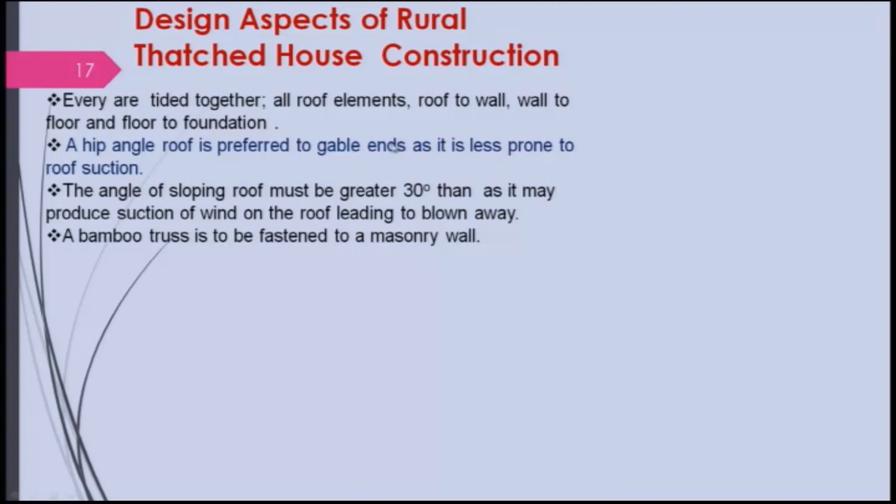Today we will continue to discuss how traditional knowledge had applied science. We teach science and technology, but we do not really make people practice it in their life. So, let us look at some more aspects. As we have seen, in a thatched house several things will be there. For example, there will be roofs made of bamboo, and this is basically the truss.

There will be other roof elements also; this you can call the spar, this you can call a rafter kind of thing, and this is a truss. This truss has to be connected with the column, and all the roof elements, which are part of the roof, have to be joined together.

That is the first important thing, and then the roof has to be joined to the wall and also to the column. In this case it is being joined here, but in earlier days people were using coir rope, and later on people started using iron nails. Again, the wall to the floor and the floor to the foundation, which is not shown here, have to be joined, otherwise the structure will not be that stable.

Besides this, there are two kinds of roof one can think of. One is the hip roof, and the other is the gable roof. There is an overhang here. Generally the hip roof is preferred over gable ends, as it is less prone to damage, because it is secured very well with the wall. Therefore, particularly when the wind speed is very high, it will not lift it out.

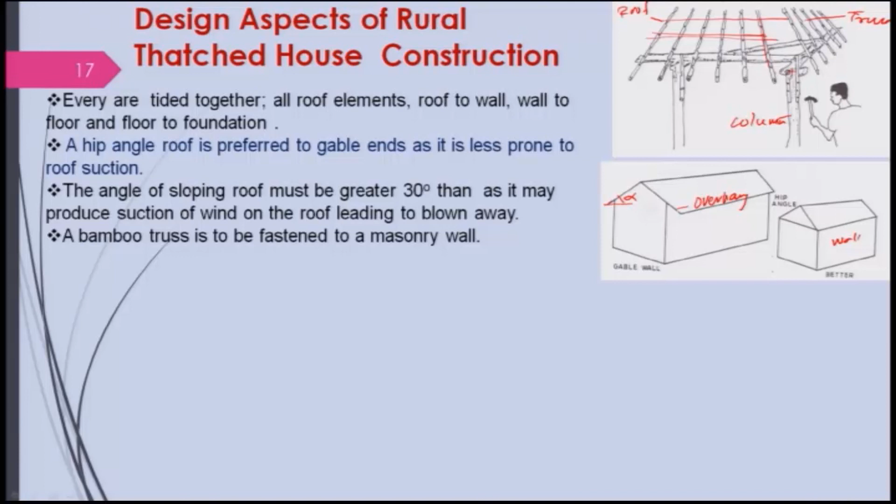The angle of sloping of the roof must be greater than 30 degrees, as a smaller angle may produce suction of wind on the roof, leading to it being blown away. If this small angle is alpha, say 10, 15 to 20 degrees, it is generally recommended that it be more than 30. Question arises why? Let me try to explain.

Suppose the wind is coming like this, and the roof has an angle. I can resolve this with the angle alpha. If the velocity is v, this component will be v cos alpha, and this will be v sin alpha. So if the angle is small, the velocity v cos alpha will be higher, and the static pressure on the surface of the roof will be affected.

We can use simple Bernoulli's principle: P_t = P + ½ ρ (V cos α)². That means if alpha is smaller, (V cos α)² will be higher, and then the pressure will be lower.

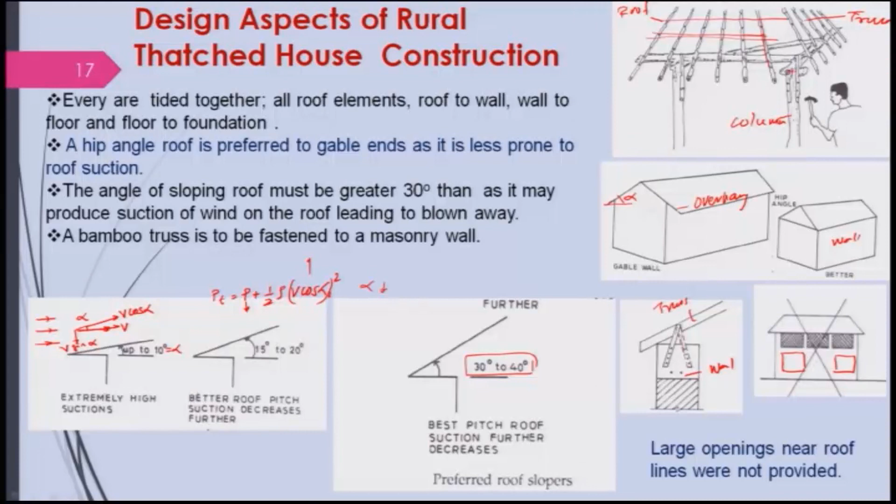So, these are the kinds of scientific ideas people had at that time, which you can see today in remote places, but in modern villages where concrete and mortar are used profusely, you will not find this kind of concept being implemented, because they do not know what they are doing.

So, besides this there is a ventilation system, which was very important in ancient rural housing, because air velocity created discomfort, particularly when either cold or hot air blows directly onto a human being. You might have experienced this yourself. But if it comes tangentially, not directly, then you may feel good, provided the velocity is not that high. So that has been taken care of in the house also.

It is important to have fresh air constantly entering the house throughout the year, not only in the summer or the rainy season, but in other seasons also. And it must also be distributed evenly to minimize sudden temperature change or draft in the room, and those are taken care of by the two ventilation systems you can find in rural houses.

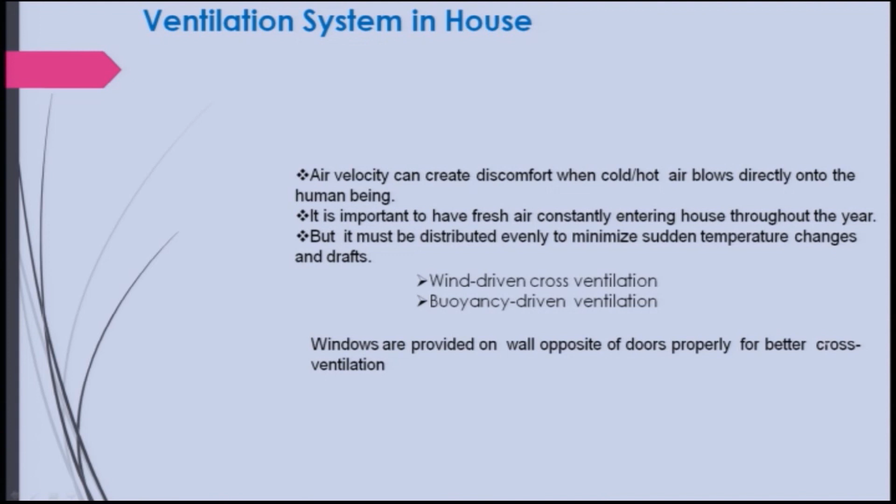One is wind driven cross ventilation, which you will know, and the other is buoyancy driven ventilation. For wind driven cross ventilation, windows are provided on the wall opposite the doors for better cross ventilation. This is your door where the air can enter, and the windows are not placed just in front, rather in the corner somewhere, so that the wind will enter the room and then go.

And sometimes some windows are placed here also in this portion, so that the wind will come over here, and that depends upon the design, so that the velocity will be distributed evenly across the room. This is a system being placed. So, also, houses were generally designed in earlier days to take advantage of natural breeze, so that the cooling can be kept.

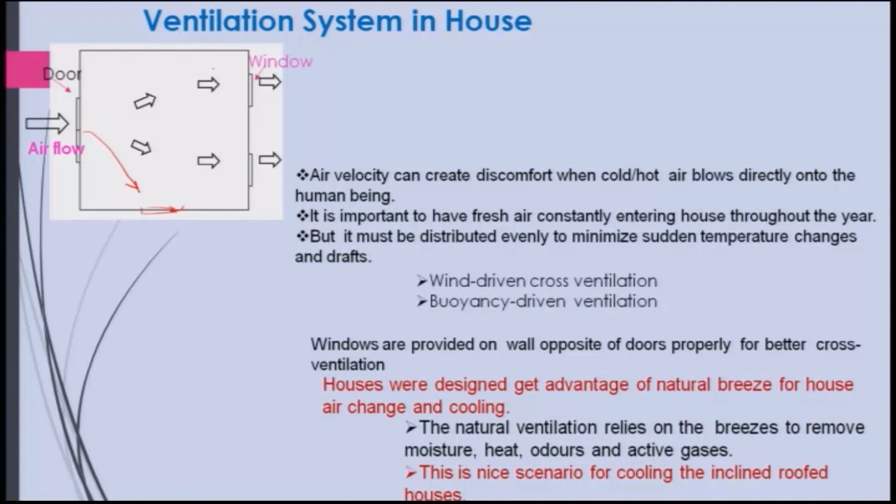Natural ventilation relies on the breezes to remove the moisture, heat, odors and active gases. There are several things that are very essential to be removed instead of closing it. Nowadays, people are staying in air conditioned rooms. It is all closed, and the oxygen level goes down if you close it. Of course, we have already seen the nice scenario for cooling of inclined roofs,

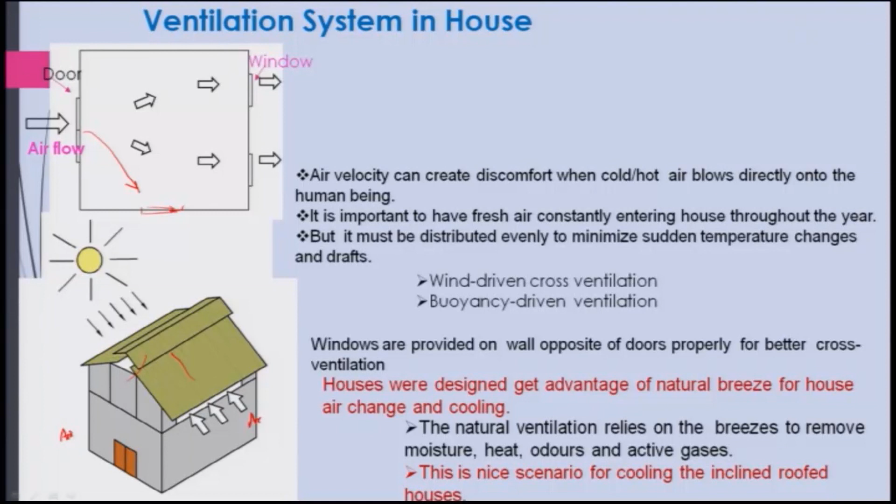as we had seen earlier. Let me look at a buoyancy driven ventilation system here. Air enters here, and there is a system of openings, and then air will come and go here, due to what? Due to buoyancy, because heat will be coming in. Let me show you a little 3-dimensional figure. This is the air which will be entering, and this is the sun providing the heat, and then there will be buoyancy, and the air will be going through this vent, then go up and pass through that.

Let me show you another figure that will be clear. So, the fresh air is entering here, and there will of course be some recirculations, and then it will carry the moisture, dust and heat to some extent, and it will be driven by buoyancy. That helps in taking it out, and then it will be very clean. So, this is a good part of this inclined roof, and ventilation can also be provided. Those things were there in earlier houses, but unfortunately today it is not prevailing, although we are saying that we are very advanced.

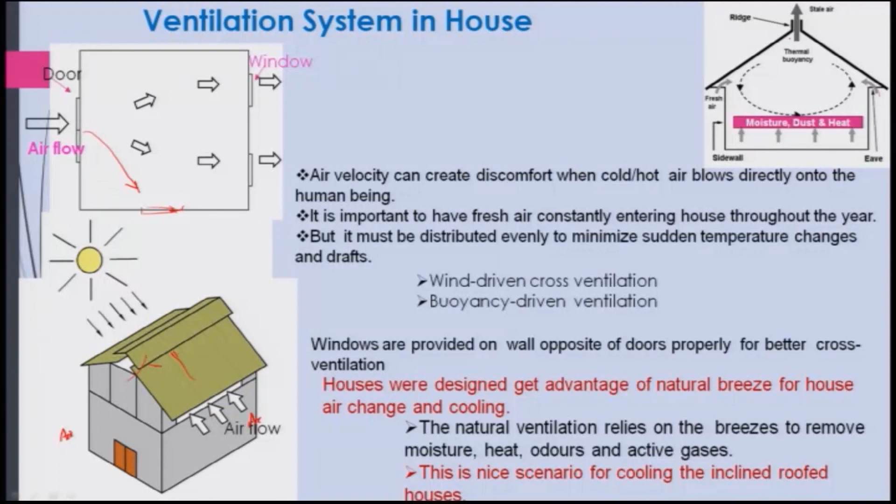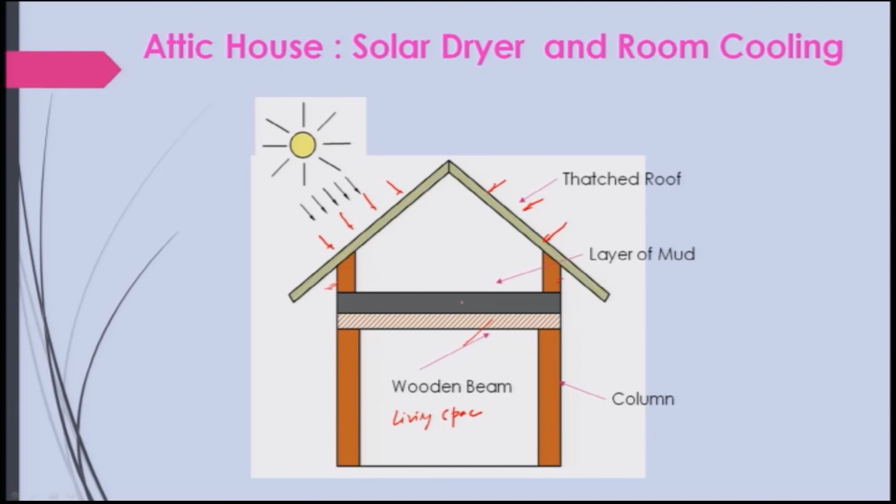And this kind of ceiling given here on the top of the thatched house helps in maintaining the temperature in winter and summer. In summer it was cool; at least I had lived for a few days whenever I visited my native village, and it was very good. So it was all there, but today you will not find this kind of attic house in the village, because all our people are making concrete buildings.

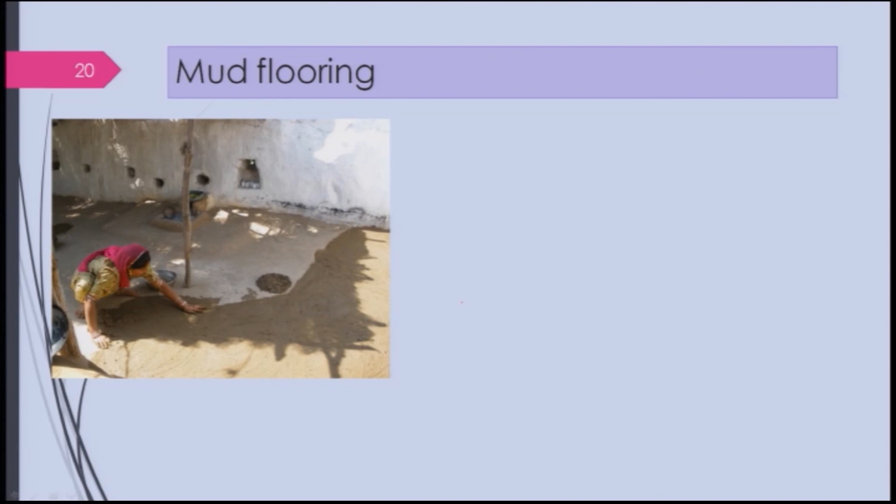And mud flooring is very important, I will be talking about it, because this is very rare to see. A woman is smearing a slurry which is prepared by mixing cow dung with mud. For doing that, one has to soak the floor with water for 2 to 3 hours, and too much water must not be used, otherwise it will be difficult. But that is an art one has to learn and then do.

Then you will have to smear this slurry either with your hand or with the help of maybe some brush kind of thing made out of cloth. Of course, she is doing it with her own hand.

And what are the advantages one may think of? If you look at it, this is free of cost, because the cow dung is available. It is a part of rural India where agriculture is the main way of living, and it will be cool in summer and warm in winter. That is what you can get, and it is environmentally friendly. It disinfects the area due to the use of cow dung.

Of course, I had a talk with somebody, and they are saying that it is a little controversial. Some people claim that pathogens decrease because of using cow dung, but some other people say something else. So, therefore, one has to be very careful and check it. But my gut feeling is that people have been doing it for ages and they were very healthy.

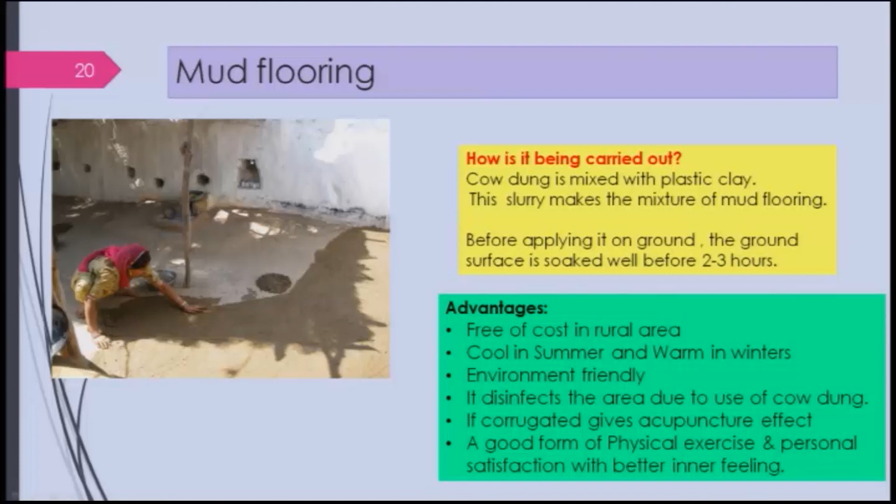And besides this, I am just remembering that the floor height also was different from room to room, particularly for the kitchen it will be different, maybe for your puja room it will be different. I was wondering why they were making it different, but an idea came to my mind: the height might be maintained for certain utility, but the other thing is that if you move around and do your work, it will be good exercise, so that your bones and other things will be strengthened.

And as I told, when you make it, one has to maintain it, and it is a good form of physical exercise. And when you do something, you get personal satisfaction, and a little bit of art is required; not everybody can really make this mud floor and maintain it. So, you feel satisfied that you have the capability to do and maintain that.

But as a disadvantage, if you look at it, skill is required, but not that technical, and human labor is required. But I will put it the other way around: if you don't do physical exercise, your body will get a lot of diseases, particularly nowadays. And it is also not very durable, that is the negative part, but it can also be converted into an advantage. The disadvantage can be converted to an advantage if you look at it in proper perspective.

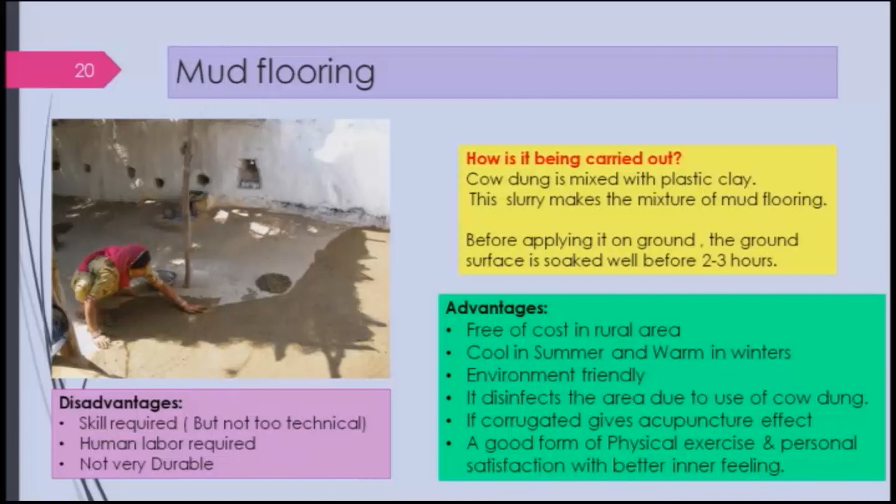So, therefore, this is what our ancestors were doing in ancient India. So, we need to look at it, and we can relearn it and do it whatever way we can at this moment. I will be showing some of the things that people have improvised. Maybe I will come to that, particularly the mud wall; I will show how people have improvised it.

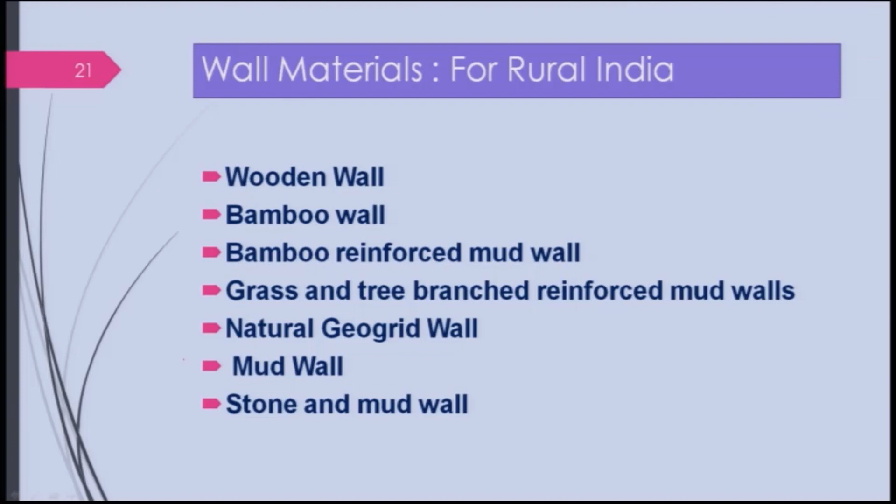And if you look at wall materials, there are several of them, like wooden wall, bamboo reinforced mud wall, grass and tree branch reinforced mud walls. Reinforced is not concrete mortar and iron rod; it is what people were using in earlier days. It is not a new concept, it is an earlier concept. Also people are talking about natural geogrid wall, and of course the mud wall I will show you a little bit more, and stone and mud wall. I will just go through, and we will learn a little bit about those things.

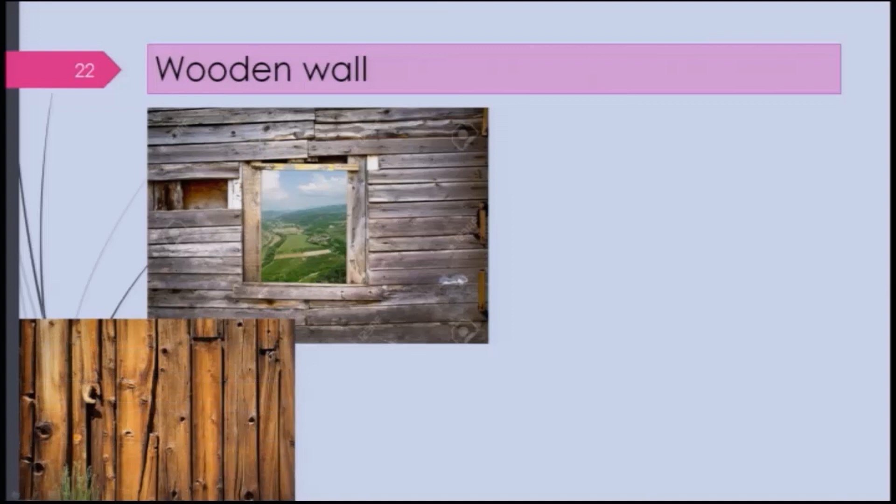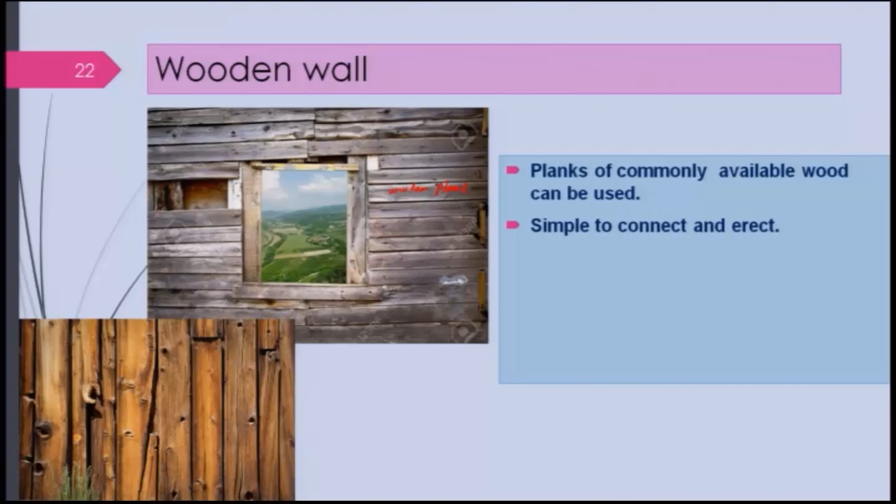A wooden wall is very simple to do, and here wooden planks are being used, commonly of different sizes, and it can be horizontal or vertical; these are the vertical ones, and it looks very elegant. In earlier days wood was very much available, but today of course it is a scarce commodity. It is simple to connect and erect, because wood you can join very easily, and it is easy to handle, unlike your brick and mortar or other stones.

And in case of earthquake, it is very good, nothing will happen. That is why people in Japan use wooden houses, you might have studied. Even in our area, particularly in Arunachal Pradesh and the Himalaya region, people used to make wooden houses. And failures, if there are any, will not be catastrophic like your concrete and mortar structures.

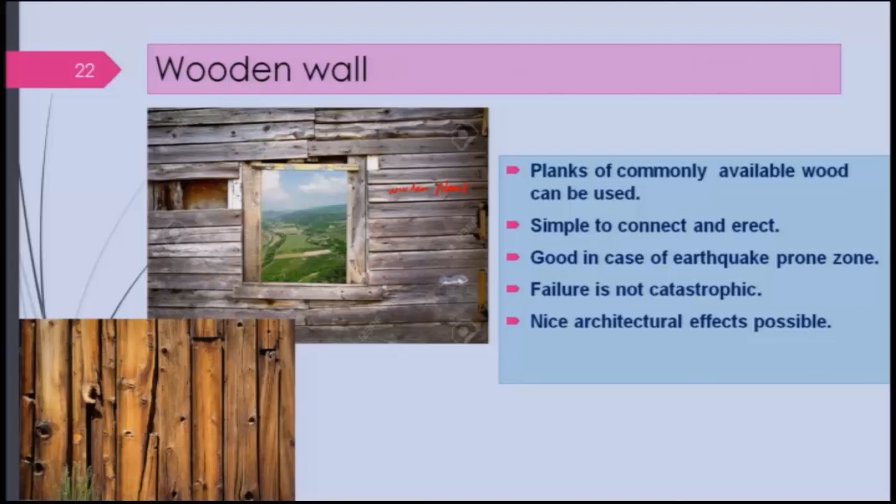And a nice architectural effect is possible, because I had lived in a wooden house which was quite good aesthetically. You feel good about it, as if you were with nature. If you love nature, you feel part of it. So that kind of feeling you will get, but of course it will have disadvantages also, like more theft cases, with the criminal activities going on in our country and other places.

So there are a lot of safety issues, and there might be termites or other insects spoiling it, and maintenance is a problem. There are several other problems associated with it. Bamboo, if you look at it, is an extremely strong natural fiber. When I was a kid, bamboo was used left and right, particularly in Odisha, because we grow a lot of good bamboos, but today it is not.

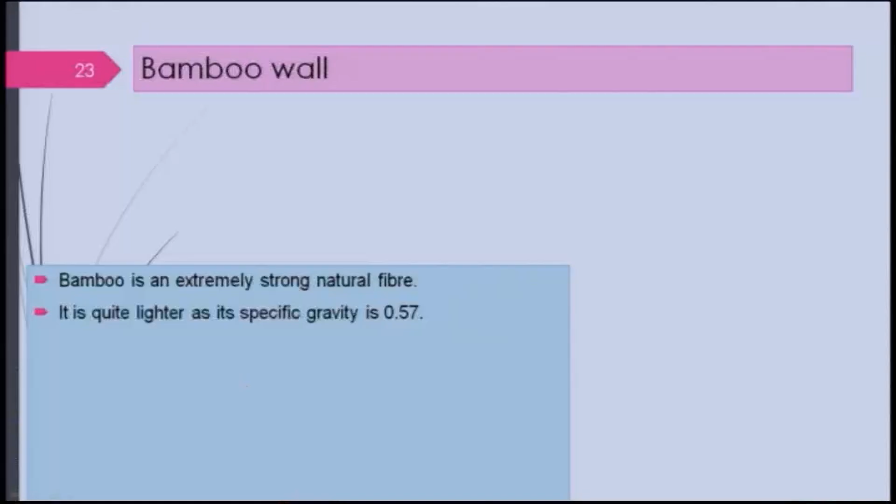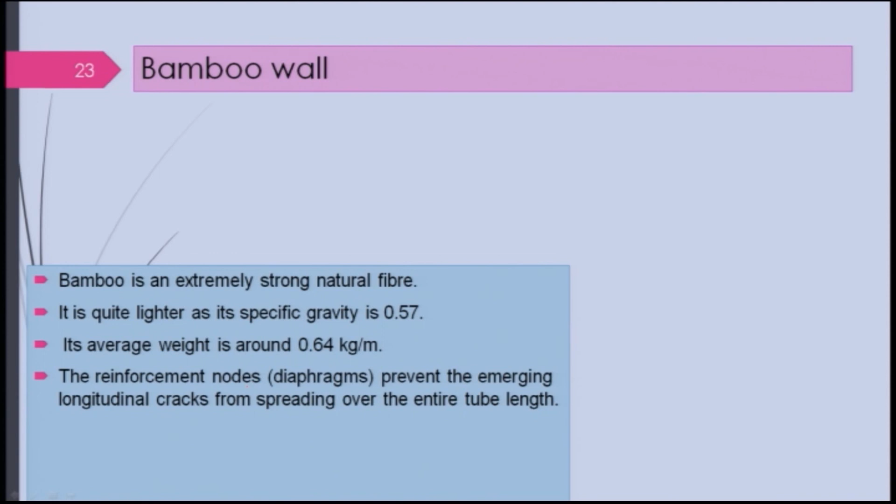It is quite light, as its specific gravity is around 0.57, and its average weight is around 0.6 kg per meter. And very important, the reinforced nodes, like a diaphragm, prevent an emerging longitudinal crack from spreading over the entire length. Suppose a crack is likely to occur in the bamboo, it will not spread, because if you look at a bamboo, there will be a diaphragm here.

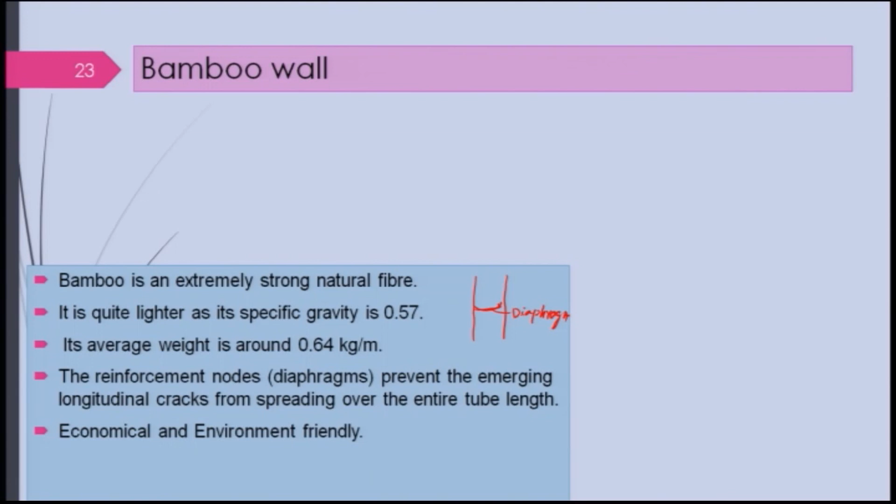This is the node, and that will not allow it to spread. This is naturally available, you need not do anything. And it is economical and environmentally friendly, it is biodegradable, and good for Indian seasonal variation in temperature, because there is a lot of temperature difference.

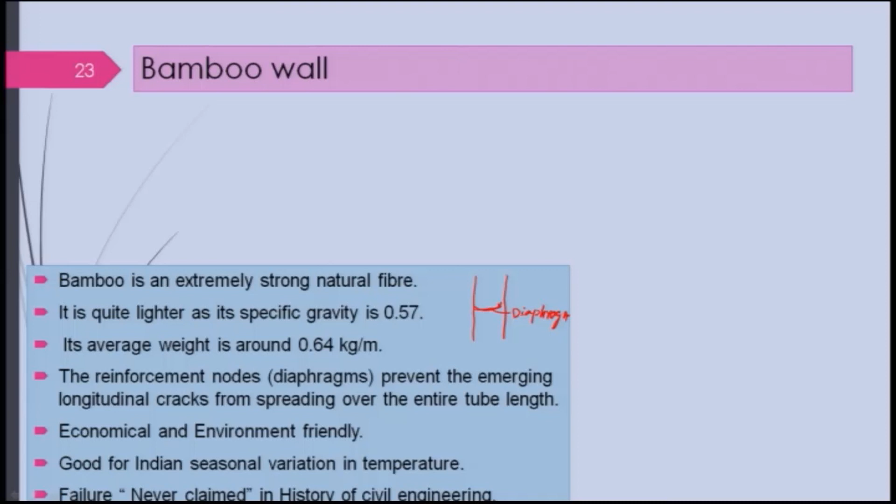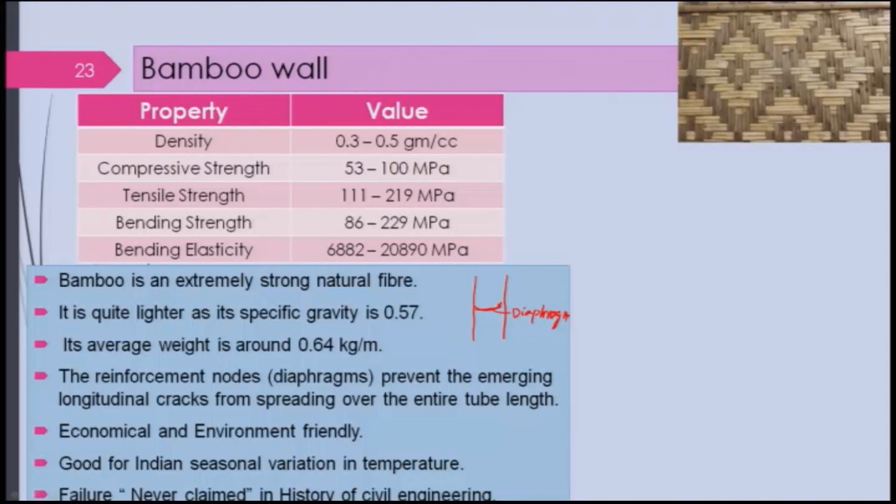And this is the house, this is a wall one can think of having been knitted. Even you can think of making dresses out of bamboo. Bamboo textiles are there, you might have seen; people can produce yarn, and this is being knitted. This is a woven bamboo wall; these are the bamboos being woven properly, even without mud cladding.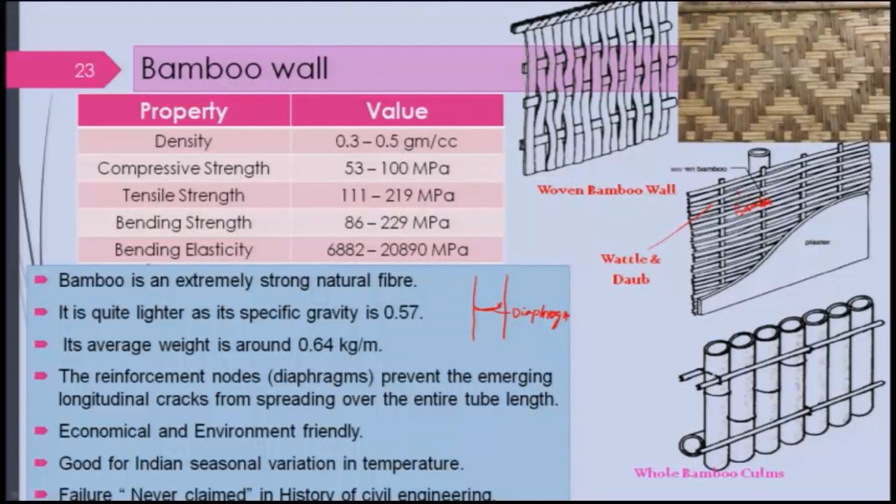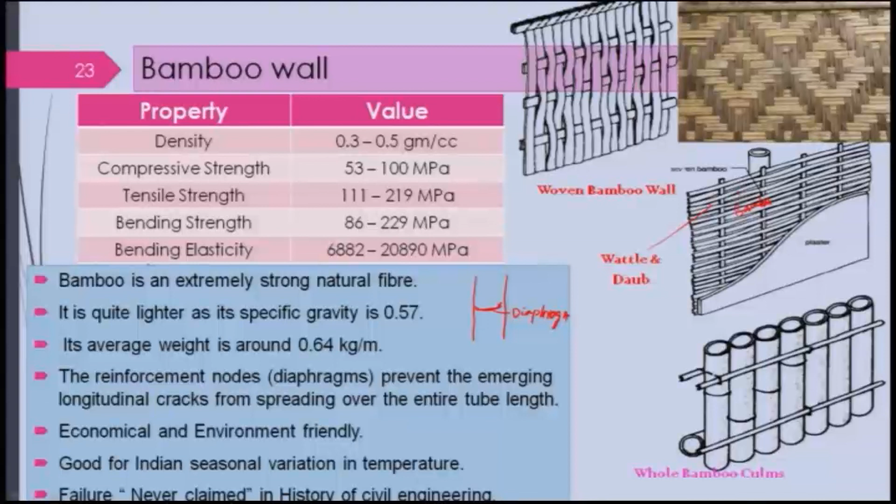There is one known as whole bamboo culms, where entire single bamboos are placed together, tied with two small bamboos using wire or rope. So there are several kinds of wall design you can find. I have just shown you a few of them, and I would suggest that you take some photographs if you come across them, particularly in Assam, Arunachal Pradesh and other places where people are still using them.

If you could get and put up a picture, that will be nice, because I was searching and could not get actual pictures. So we will stop here, and we will discuss some other aspects in the next lecture.